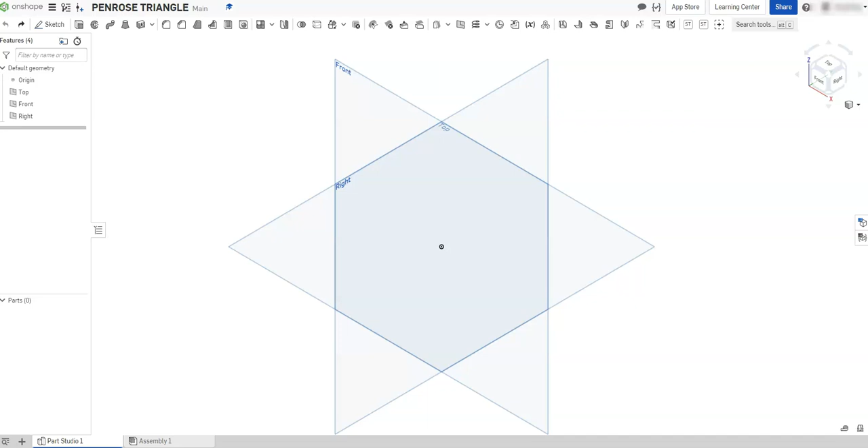So the first thing I'm going to do is open up a new Onshape window. Before I get started, I want to make sure my work units are correct, so I'll come over to workspace units and change it from inch to millimeter.

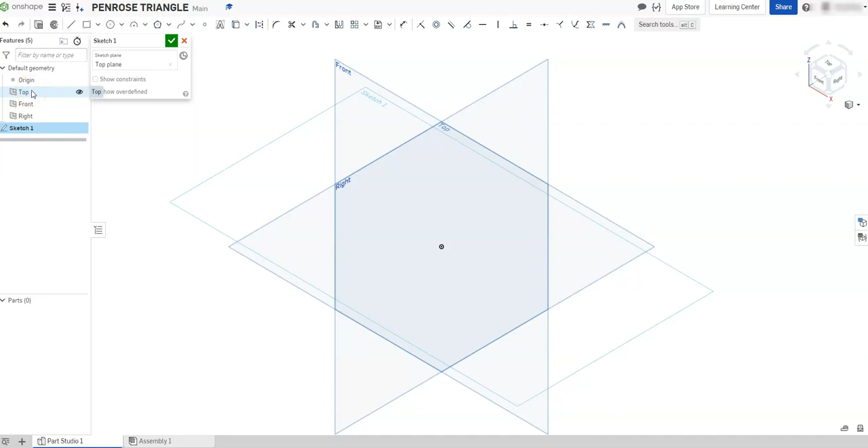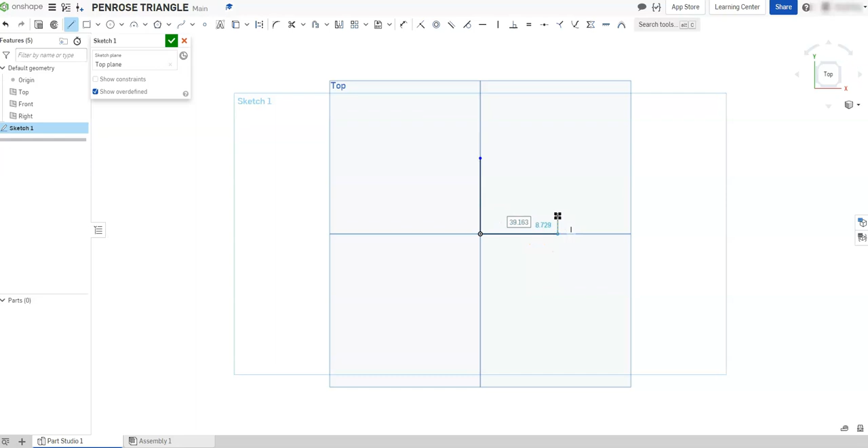Now I'm going to create a new sketch on my top plane, and select N on my keyboard to go normal to it. The first thing I want to do is create a shape, a sketch of an L. To do that I'll select my line tool, line up with my origin, make a vertical line, a horizontal line to the right, and start making an L here. I'm not too worried about dimensions just yet, we'll get to those in a second, I just want the basic shape.

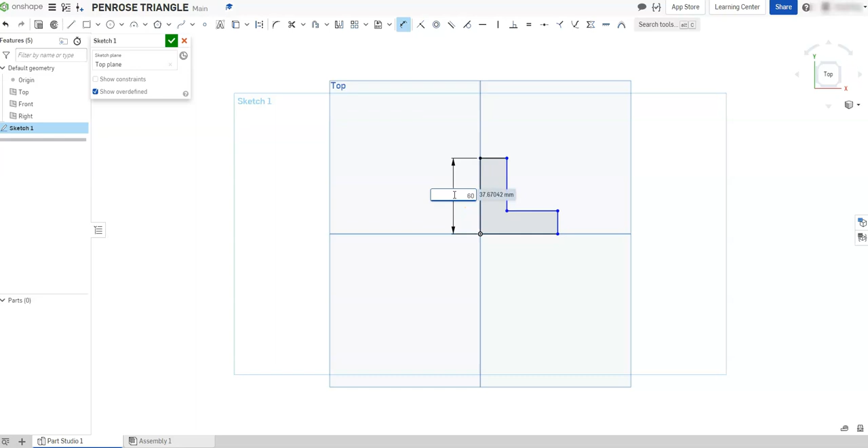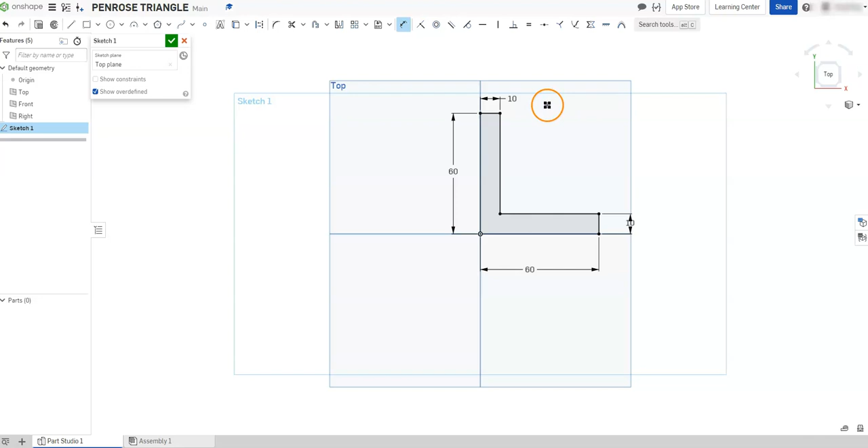Now I want to start doing my dimensions. I'll use my dimension tool, and dimension the first left-hand line to be 60 millimeters. The bottom horizontal line will also be 60 millimeters. The right vertical line will be 10 millimeters, and the top horizontal line will be 10 millimeters. Now you see all my lines have turned from blue to black, so I know I'm fully defined, and it's time to extrude.

So I'm just going to rotate a little bit so I can see my extrude better. Now I'm going to go up here to extrude, to a depth of 10 millimeters. And I'm good with that.

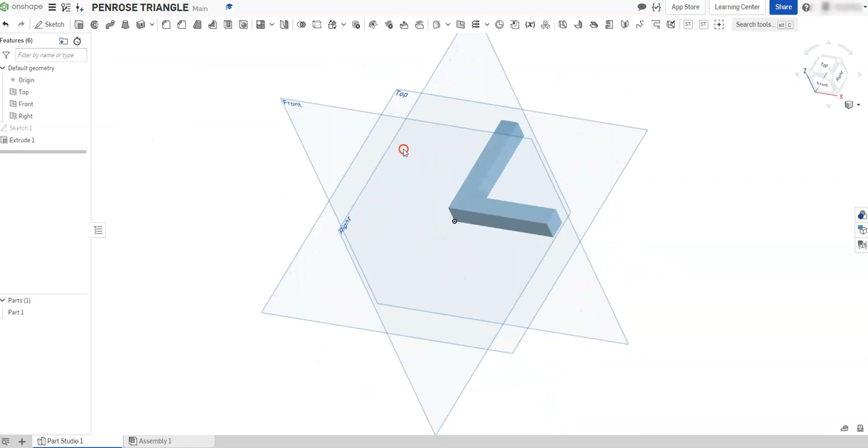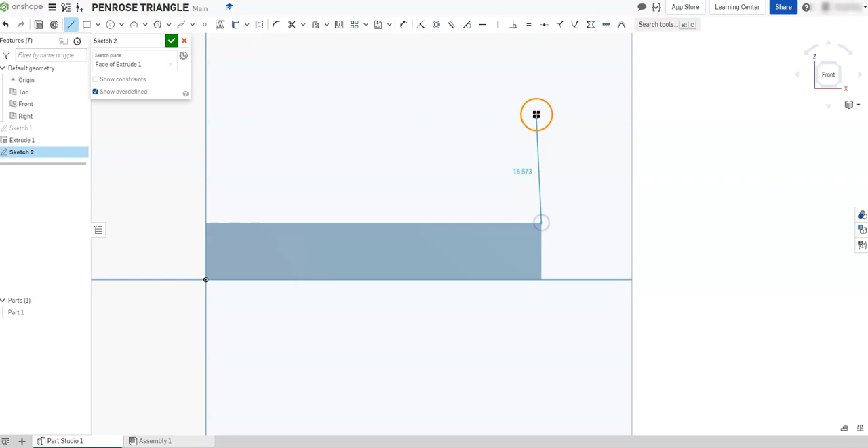Okay, so now we need to make another sketch, located on this surface here. Again, I'm going to select N to go normal to it. I need to make another shape, almost like a rectangle with a slash through it. To do that I'm going to click on my line tool, zoom in a touch so I can click on the edge of my existing part: the vertical line, diagonal line—again not worried about dimensions yet—the vertical line, and come to the right to close up my sketch.

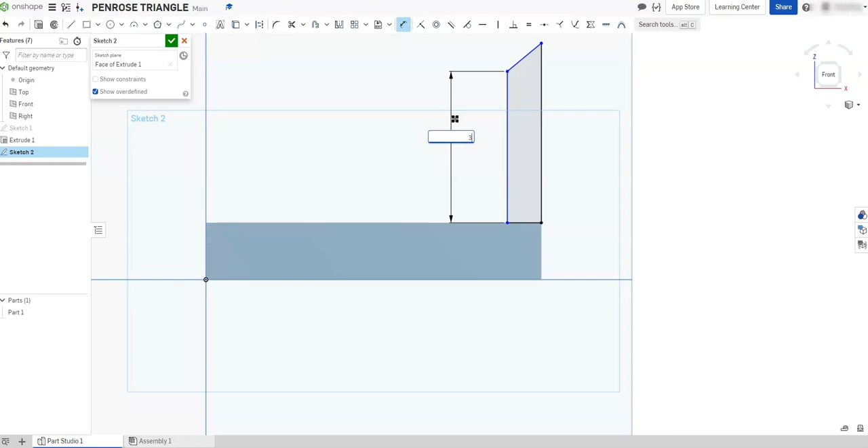Now it's time to start dimensioning. My left vertical line, I'll select that—it's going to be 30 millimeters. The angle of my line here is going to be 135 degrees. And the dimension between my two vertical lines is going to be 10 millimeters.

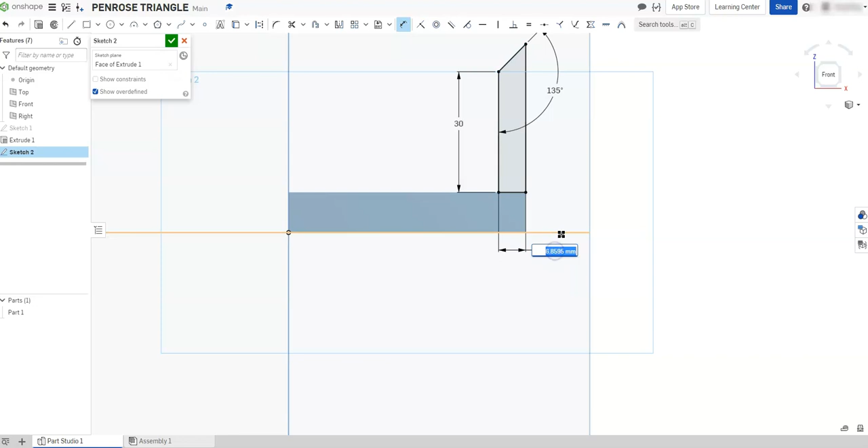Okay, again I'm going to rotate just a touch to check on my extrude before I extrude. Click on extrude, do an extrusion of 10 millimeters, and I want it to go the other way. Now, before I hit the check mark, it's defaulted to put a new part on here, which means the L piece would be one part and the vertical piece would be another. I want this all to be one solid object.

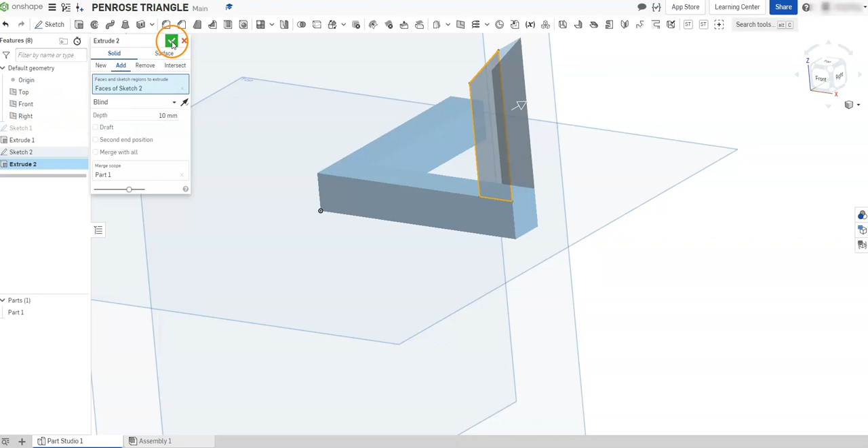So instead of new, I'm going to click on add. It's going to add to part 1, which is my original part, that's okay. Now you'll see, let me zoom out a little bit, that I have this kind of multi-angled line here—it doesn't look much like a triangle.

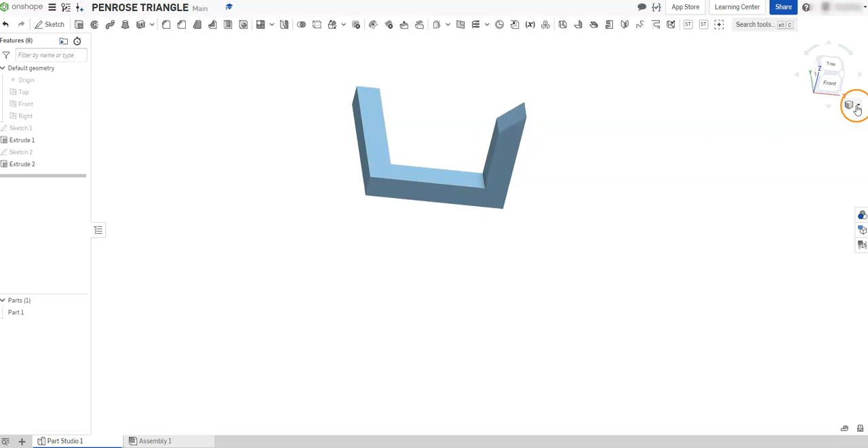But what I'm going to do is turn off my planes and turn off my origin, so we just have our little piece in space here. And if I go change my perspective to isometric, you'll notice it now looks like the Penrose Triangle. If I go back to it there's a little difference, a little angled. But as long as I stay in that isometric view, I can rotate my triangle however I want, and it will always appear to be a triangle.

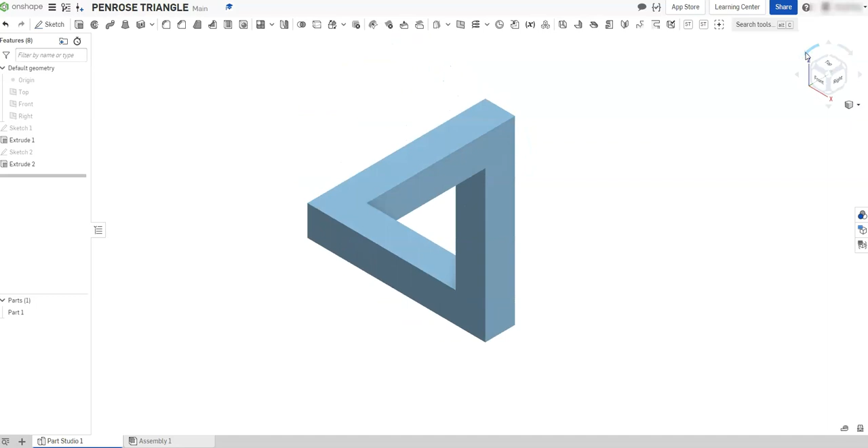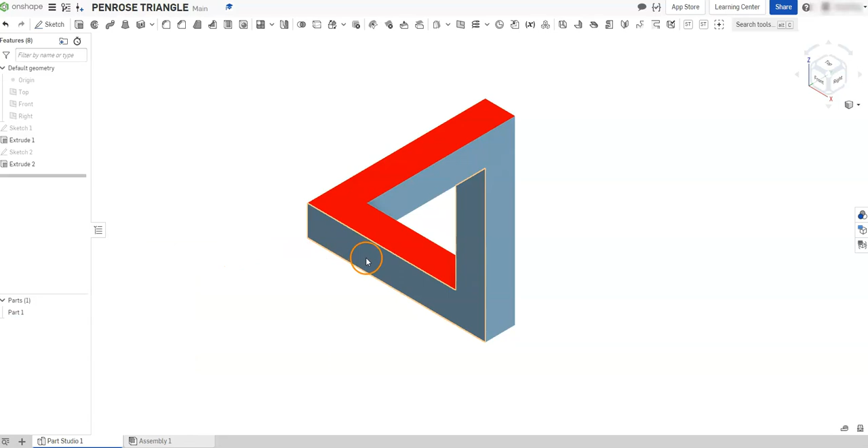Now we could do a little more with this as well—we could change the appearance of some of the surfaces. To do that, I'm going to select this surface here first, right click, and add appearance to face, and change the color. Let's make this color red. And I'll do the same for this front face—right click on it, add appearance to face, we'll make that blue.

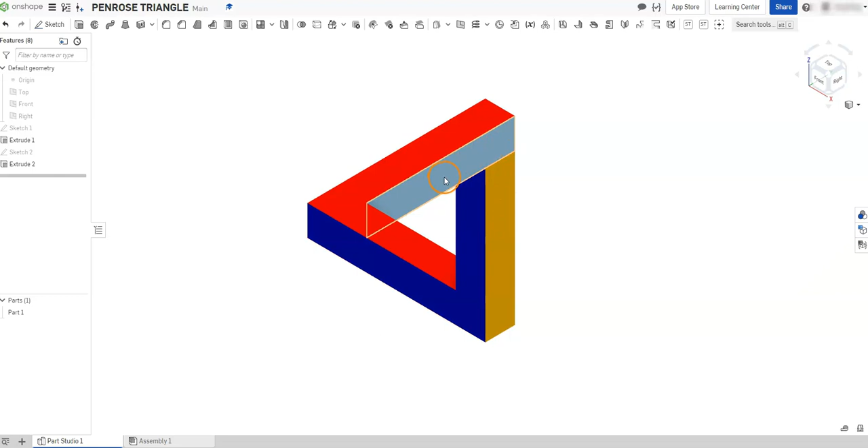And then I'm going to change the color of this face to gold. Now you'll notice, even though you may think this gray part and this gold part should be the same, you have to remember they're different planes, different surfaces—it's impossible to make those join. So I'm going to go ahead and click on that grayish blue area and turn that gold as well. Now if I go back to isometric...

Okay, that I have a— oh, I gotta keep taking it out of isometric. I have a multicolored Penrose triangle.